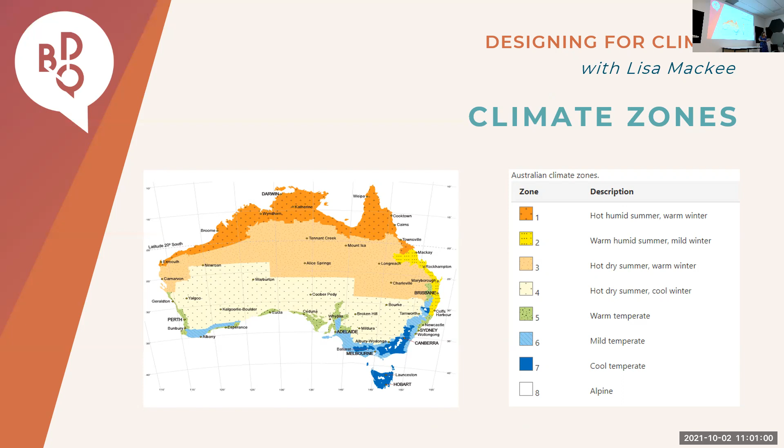So the main characteristics of zone 2 where we are here is high humidity with a definite dry season, hot to very hot summers with relatively mild winters, and a distinct difference between summer and winter, and not too much of a difference between your nighttime and daytime temperatures, unless you get that little bit west where it gets a bit cooler.

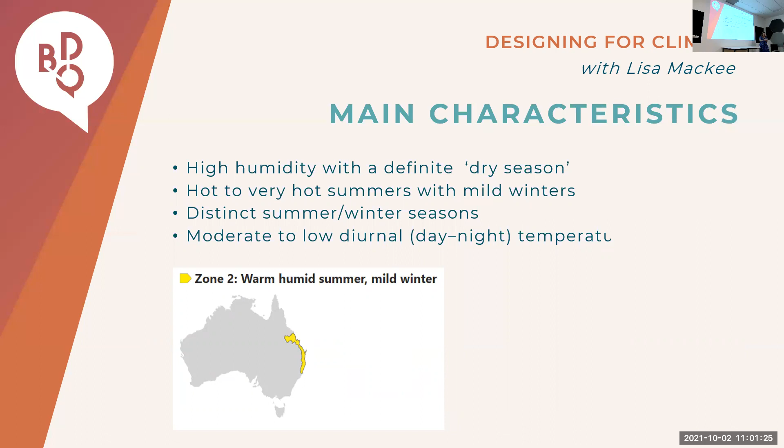So the key design objectives for designing for climate: the main objective is to utilise the natural sources of heating and cooling, such as the sun and breezes, just to minimise the need for auxiliary heating or cooling, air conditioning. So this is called passive design. You've probably heard that term.

So the main objective of passive design is to feel more comfortable in your home, and that's referred to as thermal comfort. So obviously thermal comfort also takes into account reducing your heating costs and also, I guess, the impact on the environment. I'm not going to go into that side of things too much because that could be a whole other talk on its own.

So today I'll mostly just be talking about the thermal comfort aspects. So the most economical and easy time to achieve good passive design is when you're designing a new home or doing a major renovation. This gives you the opportunity to cover every aspect of orientation and that kind of stuff.

Obviously, there are still things you can do to an existing home to make a big difference with regards to the climate conditions. So I'll touch on that in the last slide just a little bit, some little things you can do to your existing house with little to no cost.

So thermal comfort. The main factors influencing both physical and psychological human comfort are temperature, humidity, air movement, exposure to radiant heat sources, and exposure to cool surfaces. Those last two are things like your walls and slabs that can hold heat or hold cool, and obviously glass can tend to transfer the cool temperature as well.

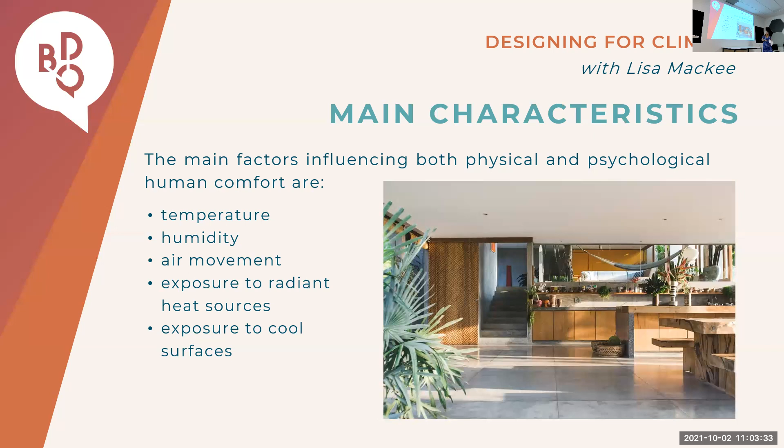So design strategies. There's a number of design strategies we address when designing a home. First, building shape. The best ideal plan for a house would be long and narrow with lots of openings in opposite directions, so you get airflow through. If you've got openings in opposite walls, that will help to draw the air through.

Then orientation - maximizing a northern exposure and also shading your western walls. Obviously a lot of these things can be really hard on smaller lots or if you're doing a renovation, so it's often not possible to get everything into your design. It's just a matter of getting the most you can out of it.

And then also room locations within the building. Obviously, on any given lot, there's going to be better locations for living areas and bedroom areas, and that can depend on the occupants of the building as well and how they live within the space.

So ventilation, the next one. Obviously ventilating your ceiling cavity or having high level openings will again help to draw the air through. And again, cross ventilation, as I mentioned first in building shape, also helps to draw the air through.

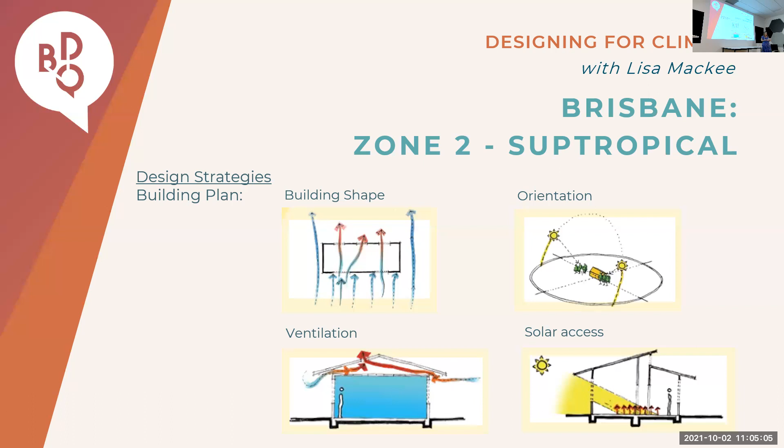So solar access, the last one, is also about orientation. A northern aspect is always best in this climate zone. Again, minimising the heat gain on the eastern and western walls and having large roof overhangs or verandas to help shade the walls and windows.

Building materials, so colour and texture. Obviously lighter walls and roofs are going to minimise the amount of heat that gets brought into the building. Also, the materials you choose - lightweight materials are not going to hold the heat the way that, say, block construction is. I'm not sure how much block construction there is down here, but in Cairns it's sort of common.

Your kind of cheaper first homeowner sort of market generally do block construction because it's cheap, quick, easy. The thing with block construction though, if you've been in a block house, is it holds up all the heat during the day, and at 10 o'clock at night you can go and put your hand on the wall and you can still feel that heat coming through.

So obviously with a lightweight frame house, you're not going to get that heat transfer. Once the sun's gone, the heat's gone. You've also got the opportunity to insulate those walls, which again stops the heat getting into the room in the first place. So that leads to insulation.

So insulation in either your roof space or your walls is going to make a huge difference. In Cairns, and I'm not sure down here, we tend to use the foil-backed blanket insulation under your roof sheeting, which basically stops the heat even getting into the roof space at all.

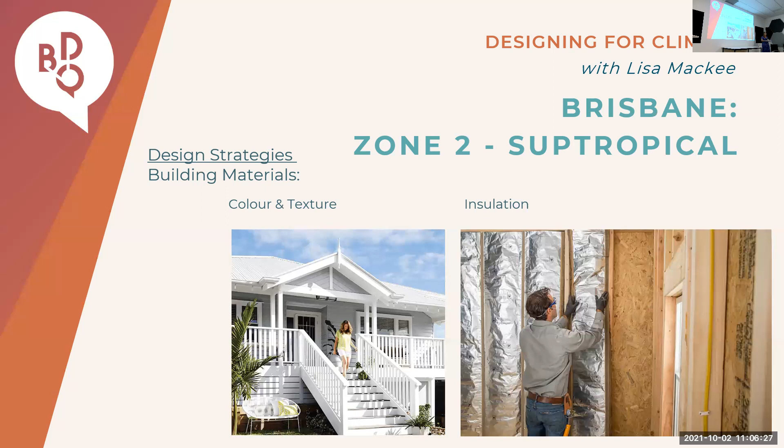So things your building designer will take into account when they're designing your house. The design considerations again include always siting the home for the exposure to the cooling breezes and cross ventilation, using thinner floor plans with openings in opposite walls to bring the breeze through, and designing for nighttime sleeping comfort - that's a big one because that also reduces those heating and cooling costs.

So windows and shading. Windows is a tricky one because obviously we all want lots of light coming in, but as far as insulation and thermal comfort, glass can be not great. So I would always recommend using tinted windows. Something that's probably going to come in over the next couple of years in the building regulations as well, with the energy efficiency ratings, is that we'll probably all be using tinting on the windows because it does just help to keep the heat out a lot.

Shading the east and west facing walls all year round. And also another really big one is using windows with the maximum openable space. So I love louvers - basically you open your louver, you've got 100% of that opening breeze coming in. So that's a really good way to get extra ventilation into the house.

So I've lost my place.

So insulation again, insulating any walls and roof surfaces from the heat and using the roof spaces to provide that buffer. You've got the insulation on your roof space, on the top of your roof, you've got that open roof space, and then that's providing a buffer between inside and outside.

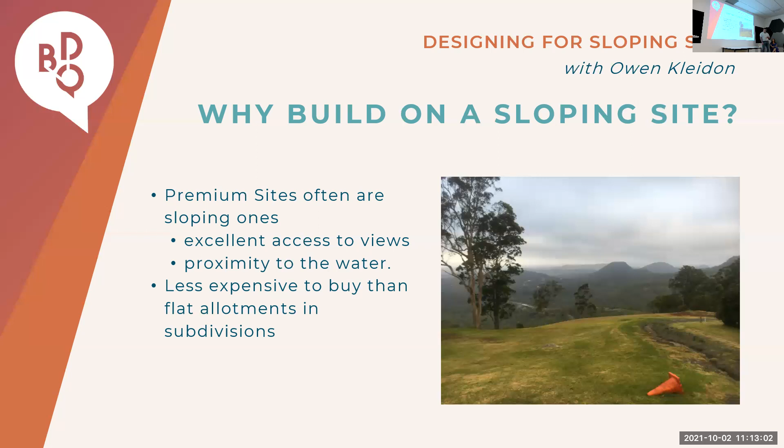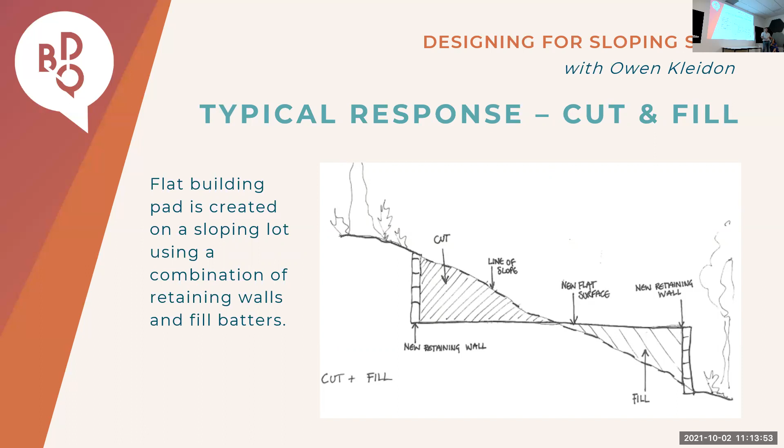What we're looking for is an appropriate built form response to the site you're presented with. What we see too often is the flat block response to a sloping site: bring in the bulldozers, cut, fill, build a retaining wall, and then apply the generic single-story residential construction type onto that. The house cost is low, or as low as normal, but you potentially spent $50,000 to $100,000 on building retaining walls and doing cut and fill on your site. That's what we want to try and avoid. So we're trying to make use of the site, work with it, not against it.

So when we're presented with a sloping site, as with every site, the first thing we do is a site analysis. We need to understand the site, its good points and its bad points.

Ideally, we all love the site that slopes away to the north or northeast, so we capture those lovely cooling breezes in the afternoon that come up from the northeast. We get the early morning sun into our living rooms, and we're sheltered from the southwest. Everything's beautiful, and that's probably the site we've identified here for you. We also get sloping sites that face the southwest, so you cop the brunt of the storms, the winds, and the afternoon sun. It's a different response, but it still works, and people still buy those lots because oftentimes those lots have a magnificent outlook.

For one, I love watching the sunset, and I love watching the storm fronts come across. On a northeast facing slope, I can't see any of those things. So it's a completely different design response depending on the orientation of the site.

The other things we want to look at are where there's vegetation and where there's watercourses, because we don't want to be building our house where the water naturally flows. We also don't want to build the house so that we have to cut down or destroy everything we bought the block for, just so that we can see the view. So it's important where we locate the house, and that's part of what we do in the site analysis.

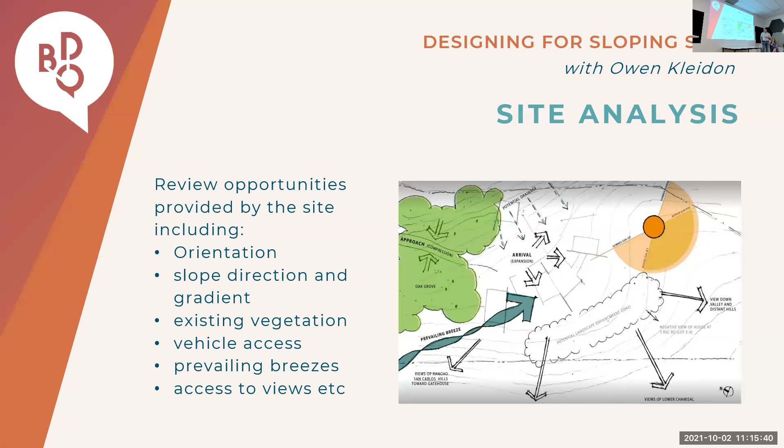Where do we start? We start with a wish list. What's important to you as the client, as the future owner of this building? How do you come and go, and how often? Are you morning people or afternoon people? Do you prefer to sleep all day and only get up at night time? All of these things have an impact on the way you start to design a house to suit the person who's going to live in it.

We design a number of houses for retiring people on the sides of hills. If the hill slopes away from the road, a common response is that there'll be a garage and a living room with a single bedroom sitting on the upper level so it captures the views. We'll then go down the site for a couple of other bedrooms and a living room, which parents of children who've left home often like to have, so that when the kids come home, they've still got a place to feel welcome. I'm planning on just reducing to one bedroom.

We look at where the garage is, where the entry points and exit points are. It's okay to have this lovely sloping site, but it's still got to be practical. You've got to consider how you get into the garage. You don't want a 25% driveway going off the edge of the cliff to bottom out trying to get into the garage. It's okay getting in, but sometimes it's not so easy getting out.

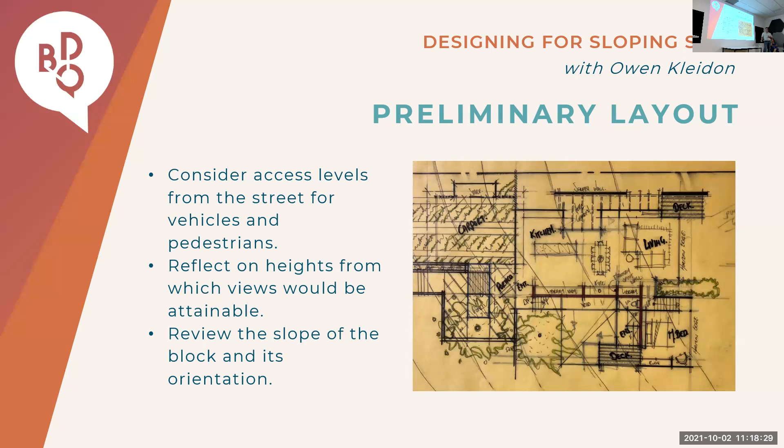Inevitably, there's going to be stairs. We start to think about how many stairs do we need, where do those stairs have to end up, and how do we minimise the number of stairs that you, as an occupant, would need to go up and down on a regular basis. If most of your day is spent in the kitchen, living room, laundry - that seems to be where a lot of people spend a lot of their time - so we don't want to separate those spaces physically by a hell of a lot, or vertically, because that becomes tedious.

Arriving home with the bags of groceries, how do you get from the garage to the kitchen to the pantry? How difficult does that become as a task? If you do that once a week for 10 years, that's a lot of trips up and down the stairs carrying a couple of Coles bags. We need to contemplate all of those things. If it's a holiday house and you do it for a week, you'd probably put up with a lot more, but when it's your house that you live in day out, you really need to have an extra focus on making it a simple, easy place to live in - convenient for the people who occupy it.

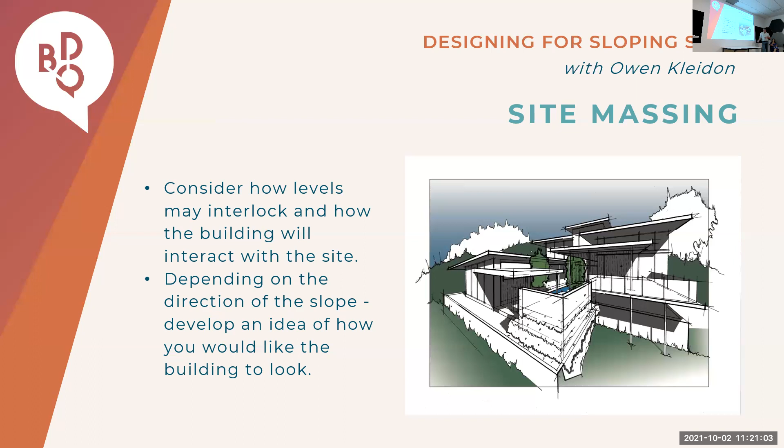From there, we've got a general idea of what we want and how we want the rooms collected and grouped. Then we start to put some bones into the floor plan. Again, we never stop thinking about where's our light coming from, where's our ventilation coming from, where are our views coming from, and how do those connectivities actually all come together.

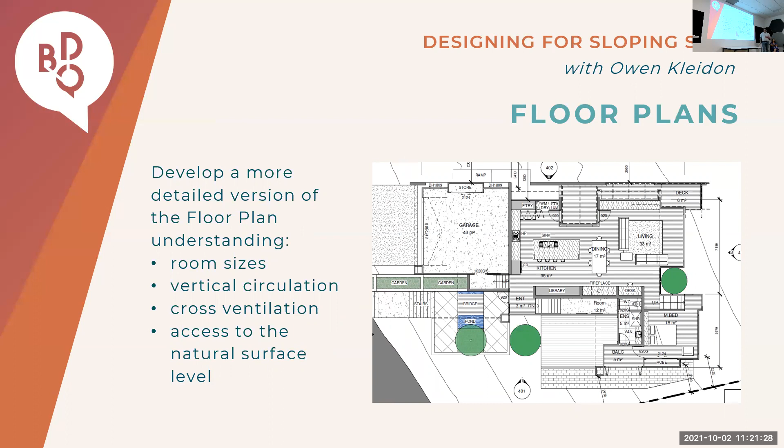Again, this is what I spoke about before - this is a necessary response in the example, but that's a full flight of stairs, somewhere between 16 and 18 stairs, to get from the car to the main living space. If you're in your 20s, you probably deal with that. If you're in your 50s, you're probably starting to get tired of that. So when we think about designing a house, we've got to think about it in the context of the people who are going to occupy it.

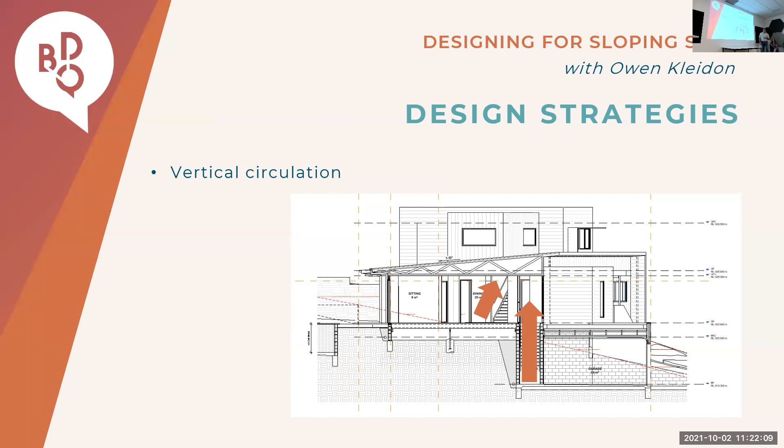Some of the benefits we get of split leveling are greater access to sun, greater access to shade. For the same floor area, we get to make the building narrower so we can elongate it east and west. We get access to winter sun by having north-facing glazing, or access to summer breezes with southeast-facing windows. So a one-room wide building that runs east-west is actually a very efficient outcome in terms of climatic response.

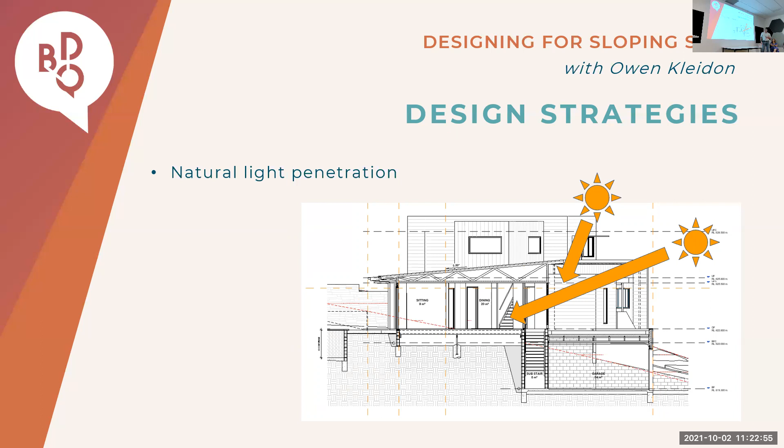And views - again, we've got this magnificent view. If we get the opportunity to get a view from every room, when you put that on the real estate brochure, that's actually worth a lot of money. You don't always get that chance, but if you do, you bought the block of land to make the most of your views. So let's make the most of it in how we design for it.

Cross ventilation - again, narrower building footprints give more opportunity for windows to be open on both sides of a room or space. The less distance there is between the windows, the more effective natural breezes are at passing through the building from one side to the other, and the less you need to rely on air conditioning to keep your environment the way you want it.

We talked previously about where you locate particular spaces where you need to transition from inside to outside. I'd pick the garage as very important. Your front door is very important. The laundry door is also very important. You see too many houses built on slopes where the laundry is one of the last places considered - and it's okay, just wheel that trolley down 15 steps to get to the backyard. You know, that's not an appropriate response to the site.

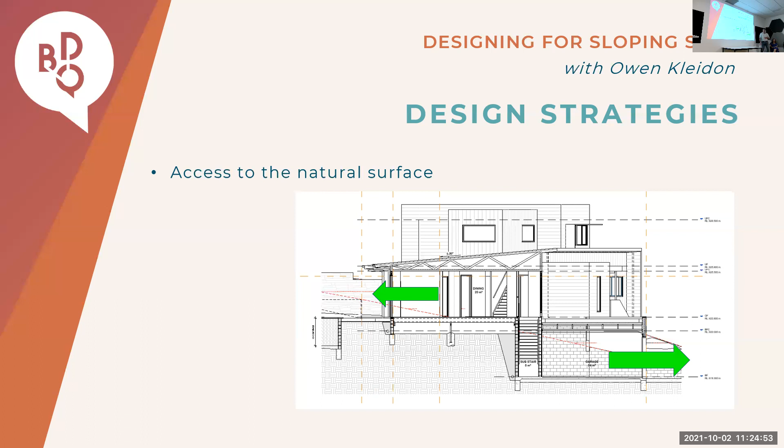On a fairly steeply sloping site, we all like to have the indoor to outdoor connection - we want our living rooms to open out to the backyard. On sites like these, oftentimes that's actually not possible. You've just got to make use of the living room and an elevated outdoor terrace, and the yard space becomes somewhat disconnected. That's a trade-off. Less grass to mow if you're landscaping, since you don't go down there.

I'll say it helps our imagination having access to 3D modelling tools. It really does - if we can play with the sizes and shapes of the building blocks. Sometimes it's kind of like play, not really work, but it lets us experiment. It lets us look at how this mass sits on the site, how that mass sits next to this one, where it gives us access to the views, where it gives us the breeze, where the parts of the building interact. And it lets us push and shove those things up, down, forwards, backwards.

It gives us the opportunity to play with shadows. We can test that building mass depending on the time of year - where's the morning sun, where's the afternoon sun, how is that different in summer to winter? It changes significantly, and as we come south it changes more significantly than it does the further north you go. So your summer design response is very different to your winter design response - you have to consider both.

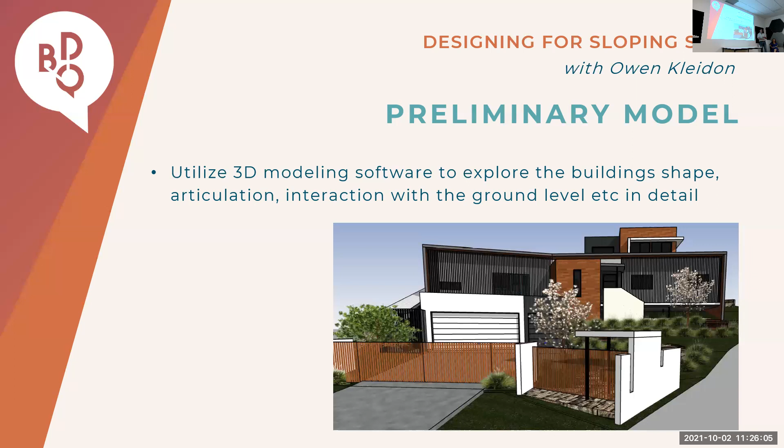Save some money on construction cost, but we burn some money on cut to fill. And we'll probably think about underpinning that in about 10 years' time.

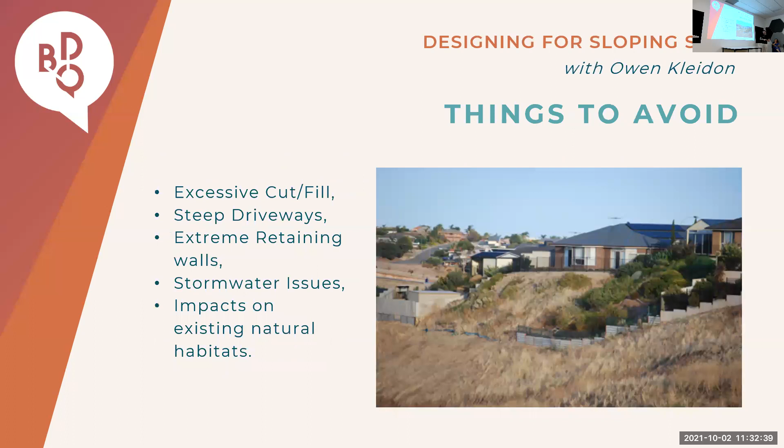Yep, cool. Sorry, I'm not much of a public speaker, so it's my first time.

So the key point about this societal unease about high density living, there are a lot of comments about people not having the appetite for great big tall buildings within these inner city fringe areas and the societal impact that that has. So this particular project being 3 levels is really a response to that, in the sense that these are micro freehold homes, accessible to things like trams and immediate infrastructure in that area, and that are mindfully designed and curated to respond to some of those outside objections when people are critical of the development occurring in these areas.

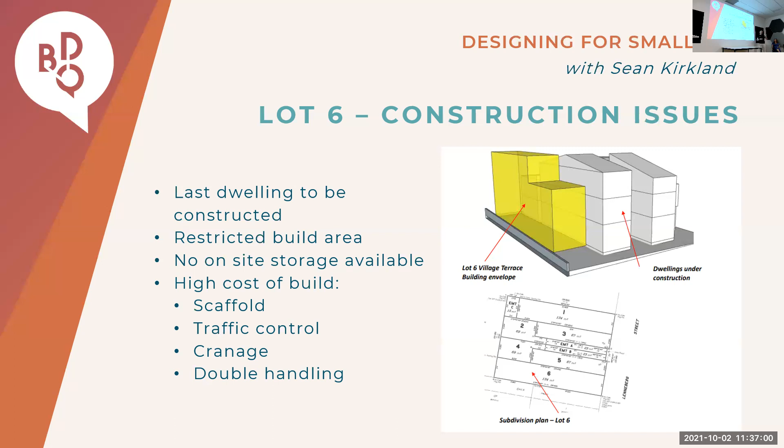So we really conceptually mapped lot 6 to understand, well, if we built them in pods and had them craned on site, we won't have the issues with scaffolding or trying to get trades in to build block walls and then timber frame and the inherent cost of construction throughout that process. So the pods were then able to be designed and manufactured off-site, then craned in, and in a matter of, I guess, a week, you have something from nothing to something in a really short period of time. So the construction, that build process really shortened throughout that process.

Sean, when you say pod 1, pod 2, pod 3, are they 3 different houses, or is that one house with 3 pods?

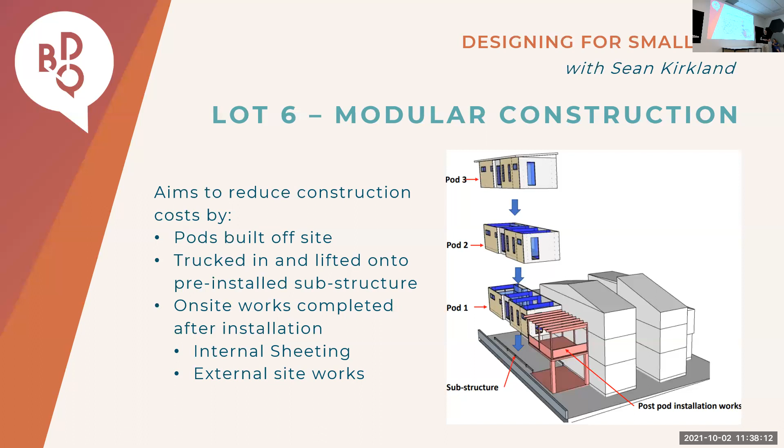Yeah, so this is one house, and they're 3 pods because it's a 3-level building. They're getting trucked in one by one and then craned in on site on top of each other. I've got a 3D model of an example of that, and I'll show you just in a tick. So this is an example of one. These lots are only, off the top of my head, I think they were 3.6 by 20 and 30 deep long, and you can see here, this is all just one home essentially. So this is one that was designed originally to be built on site, where we went away and evaluated that, well, look, it's going to be too expensive to build that. Let's look at a modular form construction.

As both Owen and Lisa mentioned, there's so much to consider in terms of the design to build process, from aspect, cross-flow ventilation, accessibility, and the buildability aspect. A lot of these projects get designed and never actually get built because they become too expensive, or there's a lot of stumbles through the process that blow out cost, or a whole range of things.

In terms of the design of this one, it had a Spanish flair to it with the arches, a lot of design trends. Obviously we're still mindful of things that are marketable and what the market's wanting. So with the arches and the different cladding types, the bricks, just some of those sex and sizzle items that the market wants on these types of homes.

In terms of the design as well, you can see through the middle when we have the climatic response, light and vent, and all of these sorts of things. Right through the middle is the staircase, and on the building next door you can see a skylight up the top there. This acts as a light well that allows 50-50 light distribution throughout the home, so whilst it's small and only 3.6 meters wide, it feels a lot bigger and more livable than you might think. You've got plenty of light dispersed in each of the levels through the 3 levels, and it just makes it a lot more livable and usable with the interaction with the space.

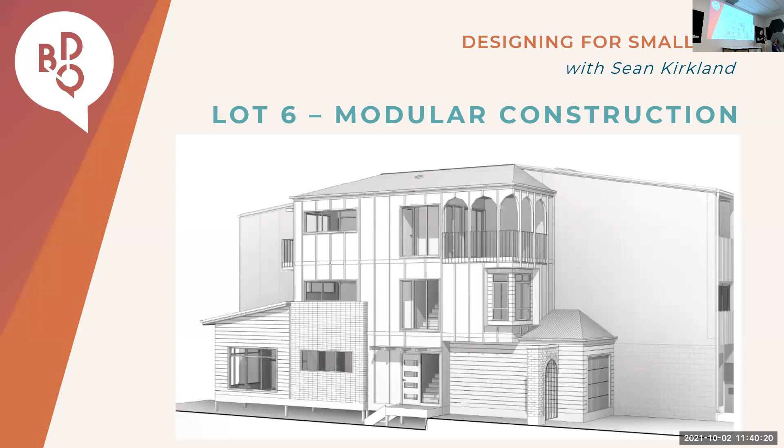So this is an example of a schematic concept on the same lot for a modular form to be built off-site where they come and crane it in. Let's see, through 3D, which I don't think we can. Essentially they're just pods stacked on top of each other, and some of the auxiliary items are just bolt-ons once everything's craned in and built.

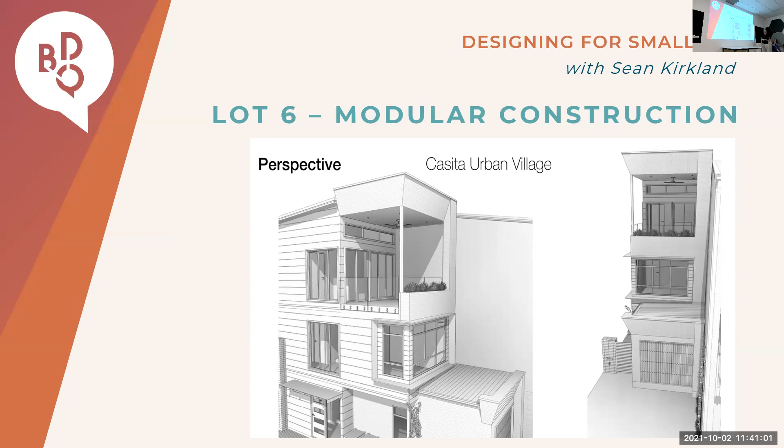So that gives a rundown of how the pods are designed and built off-site, and how that compares to the other lots where they were built on-site, and built frame on site. Just to give a bit of an example.

So with the wind loads, which is what I mentioned earlier, we had trouble getting the racking floor, so we had to build core filled block work construction on the ground floor on the other ones, and timber frame construction on top, because they're engineered in such a way that they don't take account for everything around it in terms of that build process.

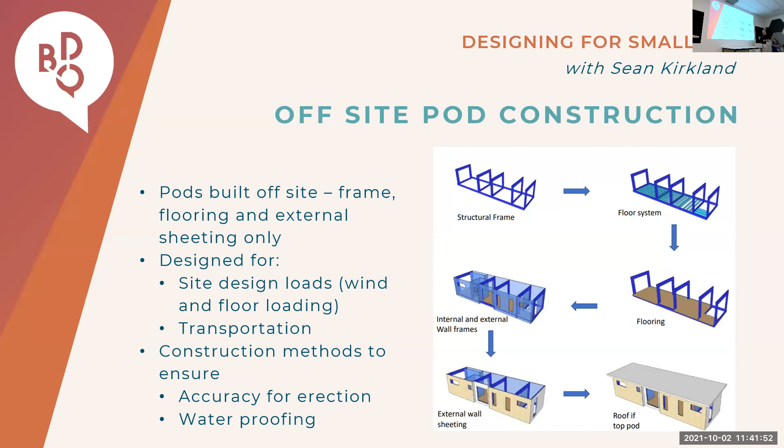Again, this was a final form with lot 6 in terms of that modular form. This one was scaled back to meet the price point of that particular client that bought that lot, so you can see some of the items in terms of the facade were pared back compared to the Spanish flair a couple of concepts ago. Again, the modular form stacked on top of each other, and then we've just got joint trims between each of the joists that sit on top of each other, and then that interaction again with lot 5 next door as well.

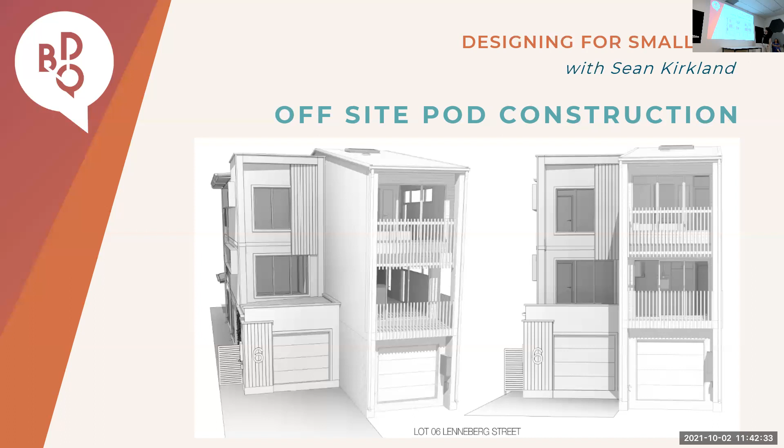Is the pod building generally more cost effective than traditional building methods?

Yeah, a whole range of reasons why. With the adjoining lots next door, because they were staged differently based off market conditions, they had a buyer for one who was unconditional and ready to move, so they needed the design built and get moving on it. But the other ones didn't start construction for maybe 2 or 3 months. What they found is when you build one on these restricted sites, and then 2 months later you go to start another site, you're double handling a lot of trades, a lot of costs that actually evaporate a lot of the margin in the project. So the modular form meant these could be produced off-site and then trucked in and craned in on site in a short period of a week, and you offset a lot of those labour costs in terms of scaffolding, a lot of the engineering requirements as well. It's a lot more efficient and streamlined in that process to get that built a lot easier, if that makes sense.

Are there a lot of builders around that are starting to use this type of method for residential?

Is it very specialised in coastal areas? It is. There's a perception it can be lower quality, but it really depends on the type of project and where it is. For instance, in an environment where you're building mass density in condensed space, it makes sense to address modular form construction, because you offset a lot of those efficiencies to get the desired outcome. But in a mass residential estate, the typical volume estates you see in the fringe suburbs, probably not, because there are efficiencies built into traditional volume build construction. If you did modular form construction there, it may end up more expensive, because the proven methodology in those areas is just brick veneer and standard construction.